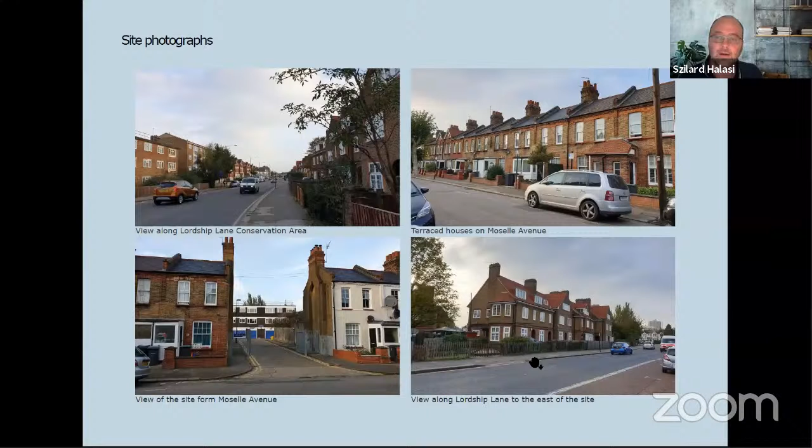So how we started the design, we did a little analysis of the local context and the constraints. Again, just a reminder of the orientation of the site - this is basically south where the sun is. Access to the site currently is through the petrol station and from Lordship Lane. There's no real access to it from the back.

Public transport is relatively close to the site. It's a good location, approximately 9 minutes to the closest tube station, Wood Green underground station, and there are several bus stops in the area too.

The use of the site is commercial at the moment, and you can see on the diagram it's actually a kind of island in the residential sea. So the area is mainly residential with a very small amount of commercial use.

The buildings around the site are 3-story. There are some 4-story buildings along Lordship Lane, and 2.5-story terraced housing on Moselle Avenue.

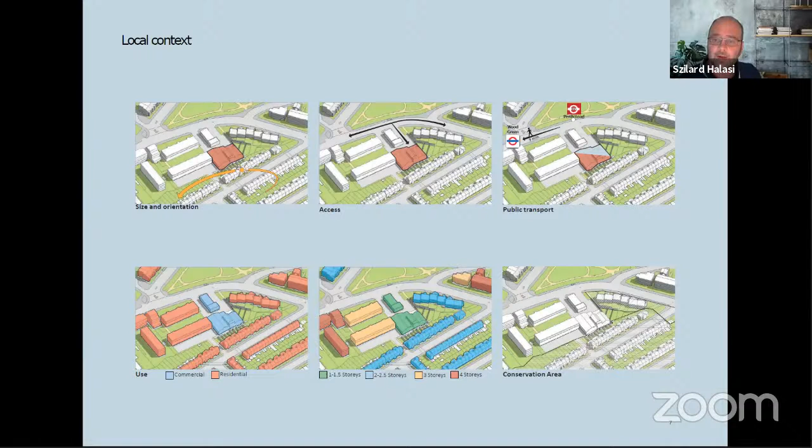The site lies just on the boundary of 2 conservation areas. One of them is the Noel Park Conservation Area to the south, which is quite a large area with 2,000 terraced houses.

Basically we just looked at how this influenced the design. We analyzed the architecture of the existing buildings, especially concentrating on Moselle Avenue because that's where the site is. You can see various features listed here, which include fish scale clay tile, which is quite nice, slate and brown roof tiling, red-brown bricks, terracotta window sills with corbels, string courses. So we analyzed what the architecture of Moselle Avenue is.

The same for the Lordship Lane conservation area, which is along Lordship Lane and consists of 4 or 5 properties grouped together as a larger house. Again, the main materials here are red brown bricks, recently refurbished and replaced roof, and pebble dash render, bay windows. We also looked at how the windows are grouped together, the proportion of the windows, how dominant the chimneys are, and so on.

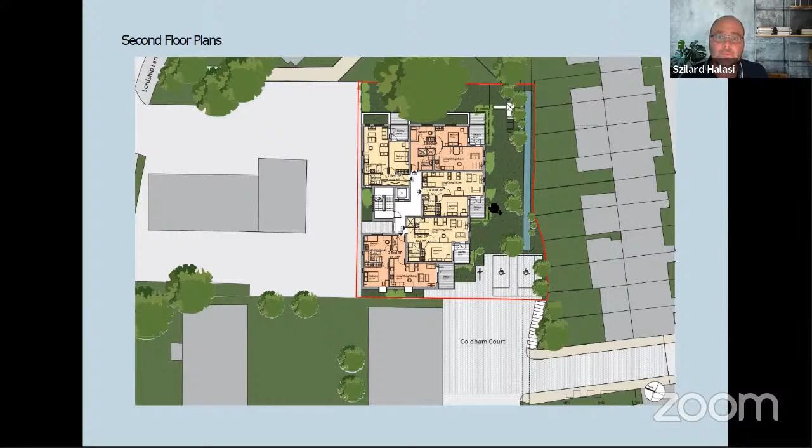Upper level, again, 2-bed units, 1-bed units, dual and triple aspects. So not just having dual aspect to maximize daylight and sunlight, but also to minimize impact on neighboring properties.

The top level, which is the fourth floor, is set back quite well from the edge of the main building. This is because of minimizing impact on neighboring properties, and also people can't really stand by the edge of the roof, so they can't really see down directly to neighboring gardens. We propose a green roof, which is just maintenance access only, to enhance biodiversity in the area.

So how it looks, how it appears. I already mentioned that we basically had a look at and investigated the area. We tried to get ideas from the neighboring conservation area, and referenced back to the architecture of these existing buildings.

You can see on the image, we looked at the proportion of the windows, which are vertical. So we try to create vertical openings on the facade using brick facade, various colored, because you get some nice mix of bricks, not just one single color. Various lintel details and bands are all interpreted into the new proposal.

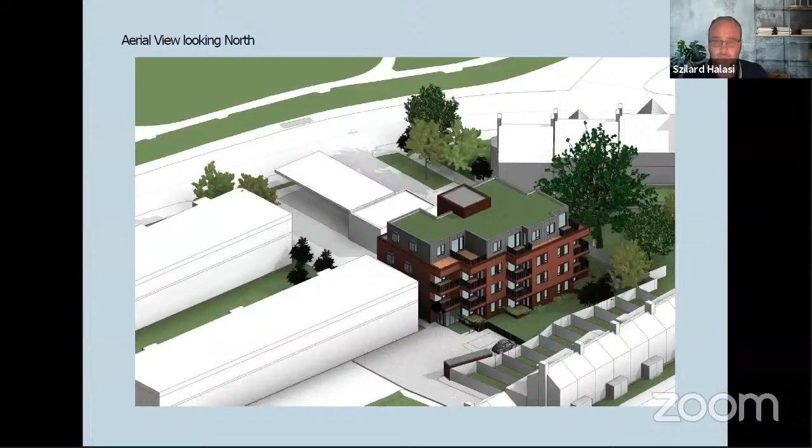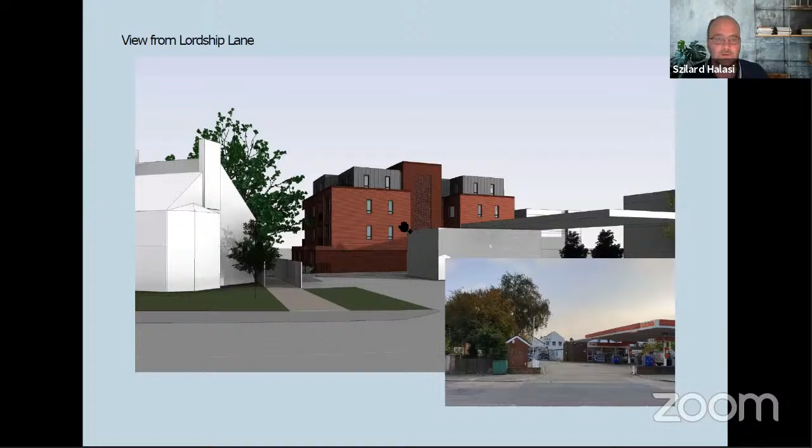A similar view just from Moselle Avenue and Lordship Lane. Again, you can see how it actually sits between the two existing buildings. The tree here you can see is just missed - we didn't show it for clarity, so probably in reality you won't even see this much.

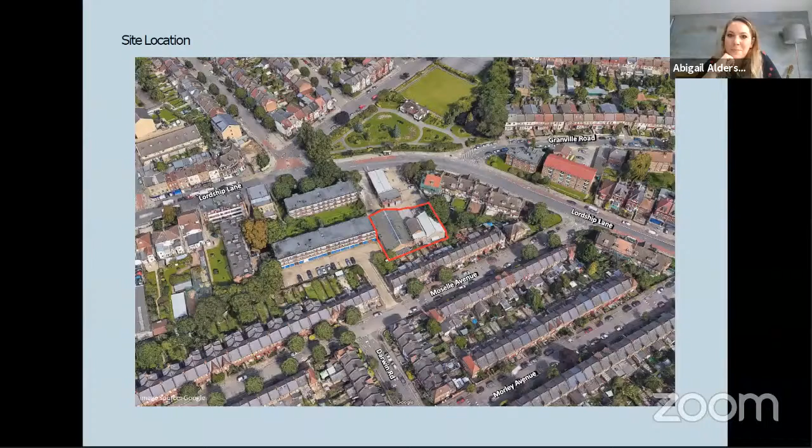Whether or not people decide to do things with it in time isn't covered under this anyway, if that helps. In terms of the question, what is actually going to happen to Arcade Windows?

You mentioned the site itself will be demolished, but will the company be relocated, or is that just unclear? I need to discuss that with the owner, but I imagine they have other premises. I think everyone's downsizing these days anyway.

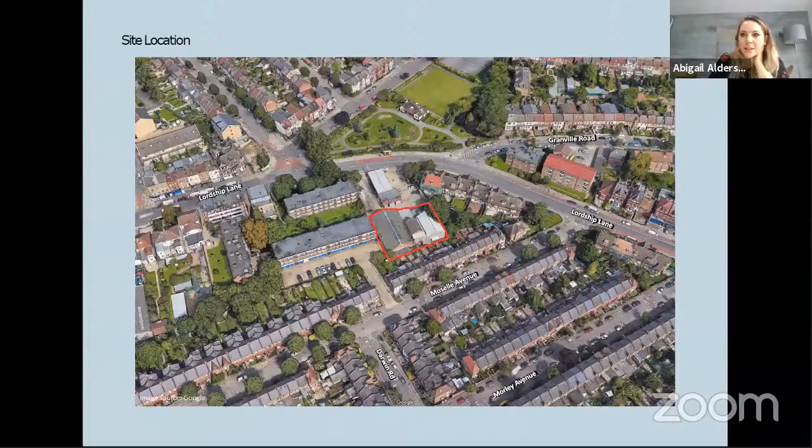So I'll say that has been answered there, it's only about the petrol station. Let's move on to that design question in a moment, but in regards to how tall will the development be.

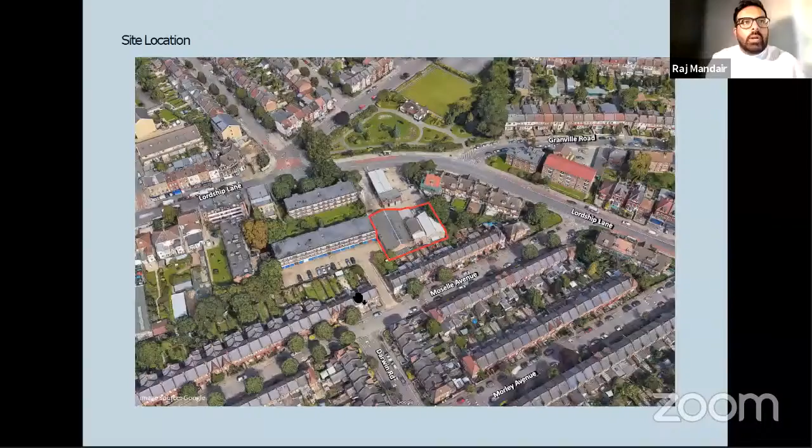Let's go to a slide that shows the development itself. There's an answer right there, it's 4 stories. I'm not sure if your question, I know I'm popping through the screens quickly, but here you are, 4 stories - that's ground, first, second, and third. Some people say ground plus 3, but it is a 4-story building.

I'm not sure if you mean what the actual height is in meters. Szilard, do we have a rough idea of how tall this might be? I know I'm putting you on the spot here. On this image, the floor-to-floor height is usually 3 meters, so the 4 stories altogether will be around 12 meters tall. But as I mentioned, the top floor is set back quite well. The main visible building structure will be 9 meters tall, which is the third story.

You just used that term setback. What do you mean by setback? Setback is basically we've got quite a generous distance - from the edge of, I don't know if you can see my mouse here, from the building line to the top floor wall, the external wall.

Okay, thanks, Szilard. So I'm going to go to another question. Here's a question in regards to why can't you build houses instead of flats? I'm going to give this a go and then I'll give this to Abby shortly.

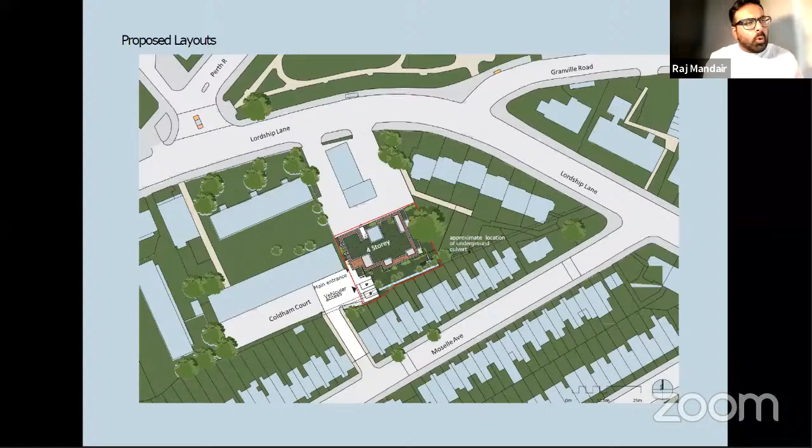So that's one of the key features regarding the conservation area - one of the basically key features in the area, the Noel Park conservation area.

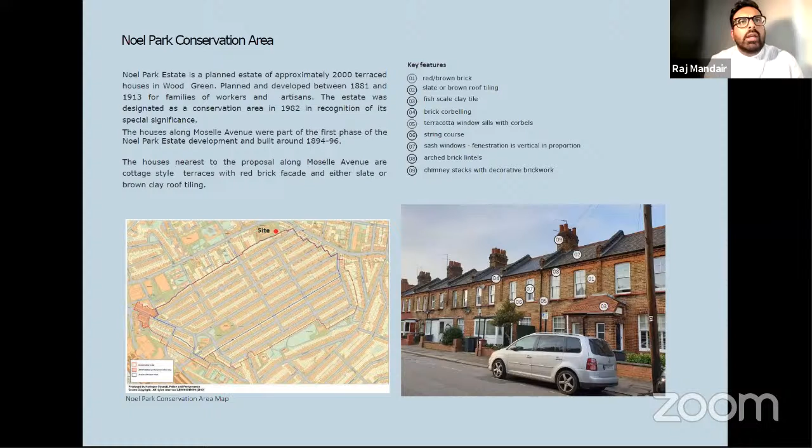Okay, I will move on to - oh, here's a question from earlier. What do you mean by generous? I think the only time I remember hearing 'generous' was probably about the terraces or the private amenity space. So what do you mean by generous here, Szilard?

I meant area-wise and depth-wise as well. The smallest balcony is 6 square meters - actually there's 5.5, 6, 7 square meter balconies. I think that's quite generous nowadays for amenity space, something that exceeds what the policy requirements would be. Minimum requirements are 5 or below 5, so it's bigger than that.

In terms of what's proposed, this image is probably perfect - on the ground floor, the homes above have terraces, and these right here are in the garden. Sorry, on the ground floor, are they kind of private? What would you call them - are these winter gardens, or are they kind of...?

What's the provision on the ground floor? I think the ground floor still has terraces. You don't have winter gardens, still the terraces, but also you have access to a communal garden area. I think that actually adds to the amenity.

Just to add to that, as part of refining the design, we've made sure they've got defensible planting so people don't feel like they're being overlooked from those using the amenity space, and they don't have to put up screens. So we've got L-shaped planting around those, and those are slightly larger. We've got a 3-bed on the ground floor. They do have direct access, but they're also slightly separated from that open amenity space. It's just one of the things we've considered throughout the design process.

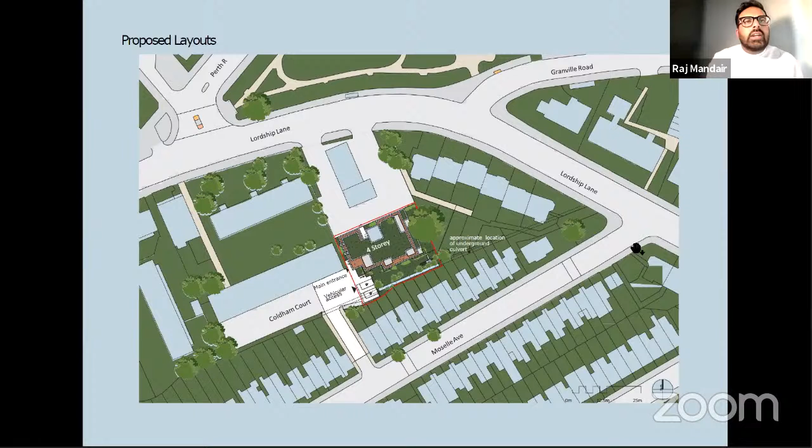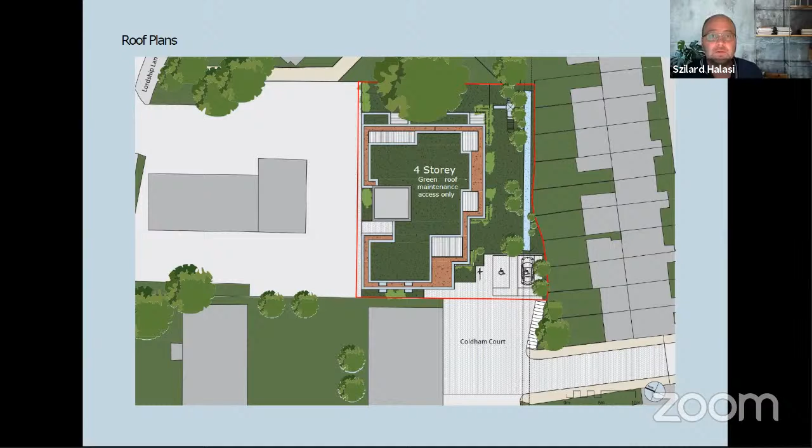Here's another question - so why can't you have a green roof terrace? We have a slide that says it's simply for maintenance access only. Why can't residents enjoy a terrace on top of the building itself? I think it's mainly to give privacy to the neighboring properties. You don't want people up there looking into other people's gardens - these gardens here, and then all the gardens. I'm going to move on a bit as well.

Let's see if there's anything else. So hopefully I answered that earlier. Will the large tree in the garden remain or be chopped down? I think that's the tree Abby was referring to earlier, though that's not within the site ownership of the applicant. Yes, so that is going to stay as well - for the person who asked that question, yes, that tree won't be chopped down.

I know these questions are coming thick and fast. Just a reminder - there's another consultation session taking place on Monday in the same format, and I appreciate that for some this isn't the ideal format. We'll also be visiting you door to door shortly, happy to arrange a phone call or meet you in person, in compliance with Covid regulations, if you'd like a one-to-one conversation in a more interactive manner. Hopefully that addresses how the consultation phase is going to take place. Tonight isn't the last opportunity to ask questions. I do appreciate it's not the ideal setup, but we're making the most of what we're able to do at the moment, and trying to answer your questions as best we can. By all means, if you don't think we've addressed something fully enough, ask, and we're more than happy to discuss afterwards or in a separate forum.

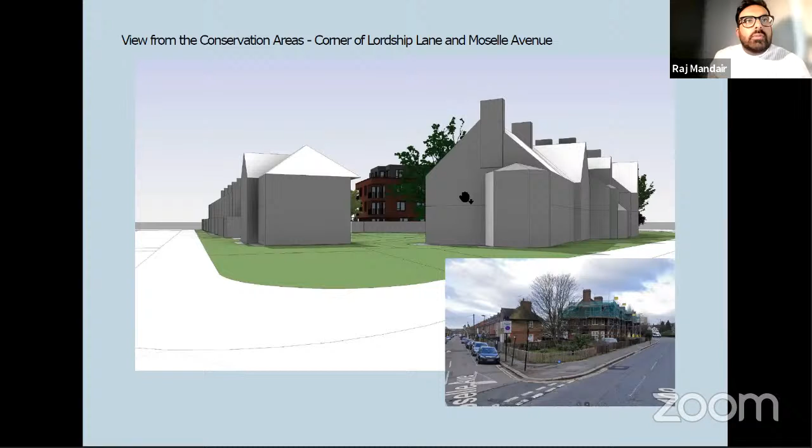Abby, I think you've raised an important point - one question that's come up a few times is the issue of parking. I'm going to group these questions together. One question is there's provision of 2 car parking spaces - where will the other driver tenants park, and whereabouts will they do that? Will there be parking inside the parking at Coldham Court?

And there's a wider question now: how do you stop anyone from doing so? I'm just going to see if there's any other questions. Someone has asked about the issue of the amount of traffic already on the roads, why there can't be basement car parking as part of this development, and why there's no car parking here at all. Harry, would you like to give that a go?

I'm just going to move to the plan - here, I think, is probably a good image. Is that fair enough?

In terms of why no car parking, or why there are 2 blue badge car parking spaces - it's particularly led by the London Borough of Haringey, similar to other local authorities, who have a strong preference for car-free developments, particularly in areas with good public transport links like this site. As part of the development, at least 10% of homes must be accessible, and that's why there's provision of 2 blue badge car parking spaces.

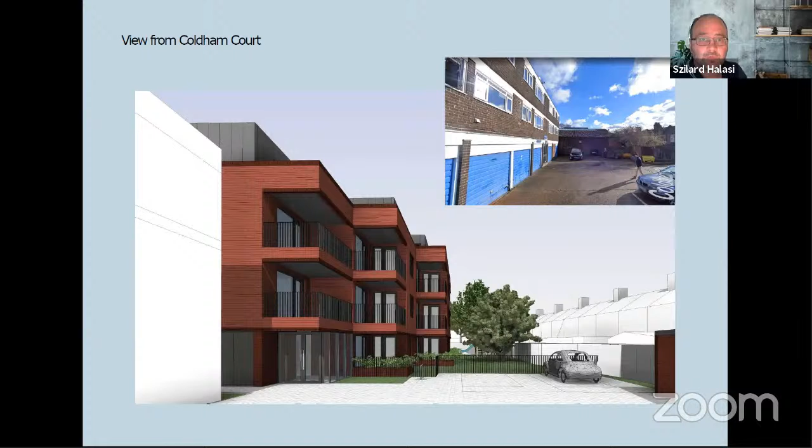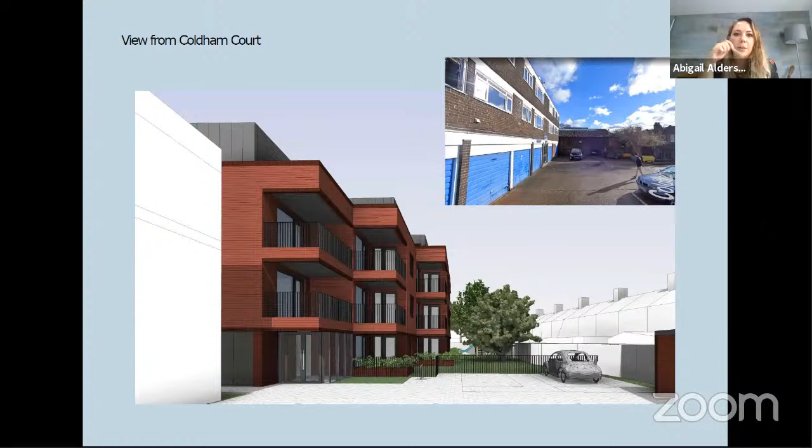Whoever submitted that question - where exactly are they cutting through? Because at the moment there's no access to our site from Coldham Court. But whether it's that you're worried they will do, it'd be good to know. I'm not sure if they can go through here or not. Not at the moment, I don't think. I think there's a fence right the way up.

By all means, do let us know, because that anecdotal information is actually really crucial. I think it's a very good point, knowing how the site operates. At least when we go through the consultation for secured by design, we can think about this - it's not the final design, it's still in progress. So we really welcome these comments, which we can implement and add to the plan.

Raj, did you say there was a previous question about whether or not Coldham Court will be fenced off as well? Did that come up previously? Yes, that's right - whether access, how would you still access Coldham Court? So Coldham Court, that access is something we have a right of access to, but it's not within our ownership.

So we might be able to agree improvements along the highway there, or whether or not it's decided to be secure access. But by all means, that'll have to be done with the council and with Coldham Court. And you mentioned, I think it was Szilard also mentioned, Secured by Design - so who are they?

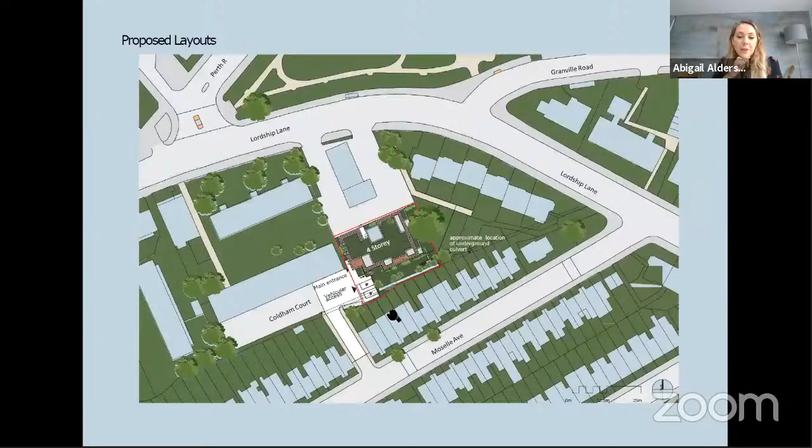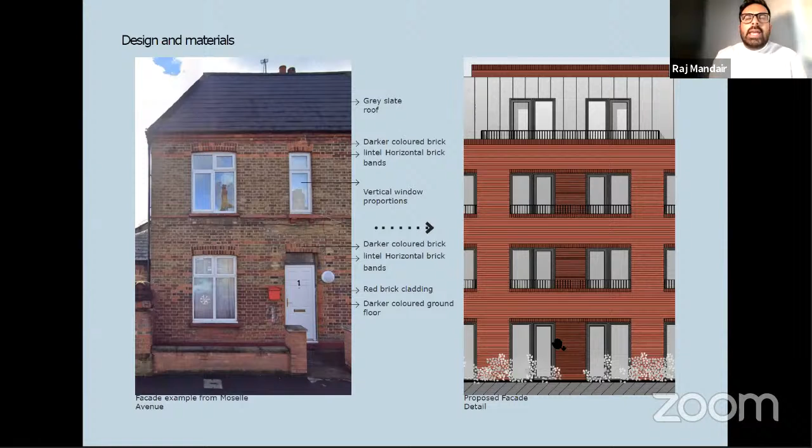In terms of what goes on here, these kind of darker areas, part of the development, and also this part here - what's this material here? Darker material is still brick, just going to be darker brick.

And the staircase, actually, maybe you can see a bit of a translucent stair, so you can see through it. That's a perforated brick, meaning every second brick is going to be left out, so it's basically a hole you can see through. You can have the light coming out as well, so it's going to maybe light a bit the petrol station area, which might be a bit dark. So that's the idea there.

Just to add to that, we've been having discussions with energy consultants, and that really improves the ventilation by having those open brick areas. Also, back to the green roof - it doesn't have to be green, but in terms of energy credentials, it really does add to the scheme and make it sort of carbon neutral, which is what they're aiming to achieve across London.

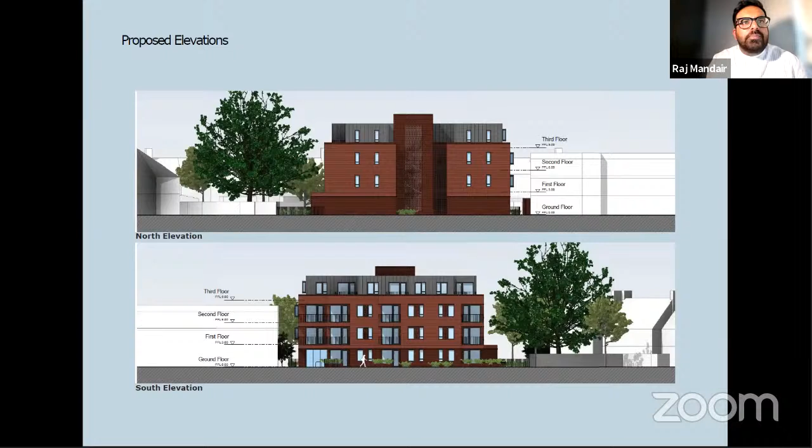So, okay, in terms of - oh no, you mentioned green space. The question here is how much children's play space. I guess we mentioned there will be green space, but let me find it - we mentioned children's play space. I think here in the presentation we've labelled it.

I've actually looked up the policy, and it's only 3 square meters per child required for playground play space. Given that most of the mix is 1s and 2 beds, with 2 three-bedroom apartments proposed, we're providing well above that - I think about 125 square meters, that kind of region, yes, it's quite a big play area. The playground and landscape is still going to be designed by a professional landscape designer, and as Abby said, the area dedicated for the playground is going to probably exceed all requirements set by the council.

So can I ask a quick question about that? Abby, you mentioned - I can't remember how many square meters it was per child - but how is that worked out in terms of the development? So this is 17 homes - how do you work out how many children there are going to be as part of this development? It'll often be based on the unit mix.

So I'm not entirely sure what Haringey's policy is, but a 3-bed might have 1 or 2 children as expected per unit, and a 2-bed might have 1 or half. Obviously in practice you don't have half a child, but it'll be averaged over the unit mix. So there'll be a formula that they would have, and that's how you do the calculation.

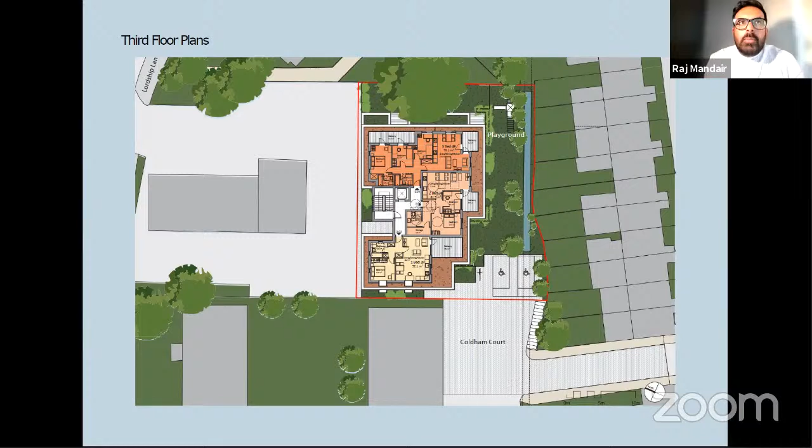Yes, but I think based on the mix, we are still providing well above that. And obviously we still have more discussions with the council on affordable housing. I believe the council also own Coldham Court, so whether or not it's available to residents of that we will need to iron out in due course. At the moment the plans show a green space, and I'm not sure what the marking here is on the floor plans, but we've labelled it as playground.

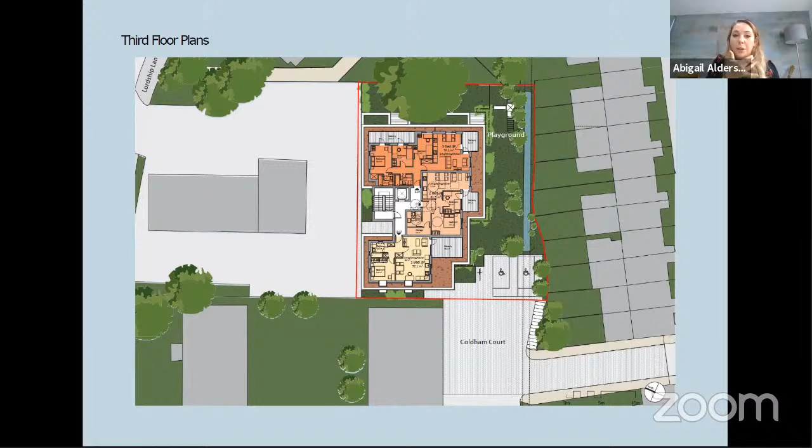Will there be further information in terms of what it will look like, and it won't just be green space? Yeah, I'm sure with the planning application we will submit a landscaping strategy showing visuals, all mapped out, and that can be conditioned as well so it has to be delivered in line with that.

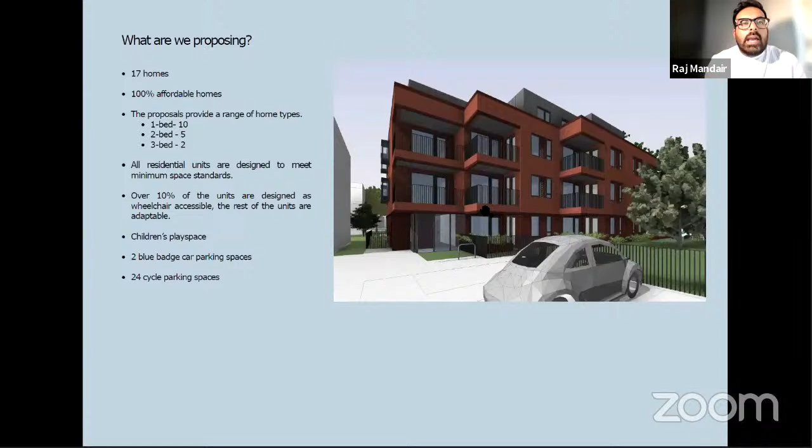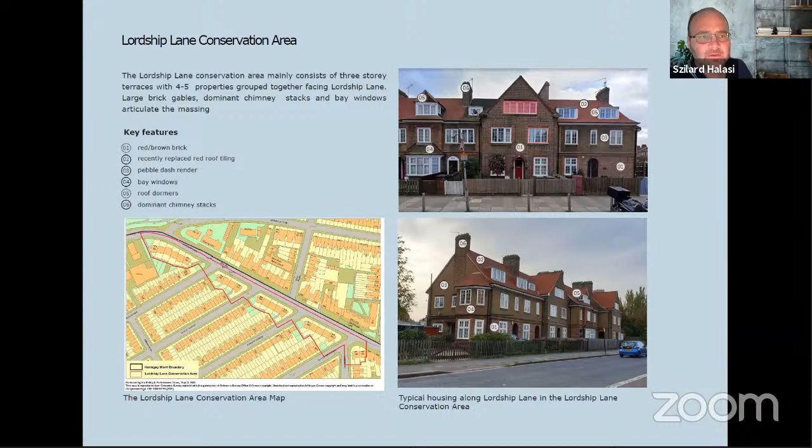So we haven't mentioned this previously - I think we are coming up to something like separation distances. So I imagine, what is the distance between the building itself and its neighbouring buildings? I'm not sure what the best slide there is, Szilard. I imagine another kind of follow-up question - the site plan would be the best to show. Okay, I'll let you get back to that, and I guess another follow-up question.

So one is the distance from neighbouring buildings, and is it going to impact overlooking, daylight and sunlight of neighbouring properties? The separation distance is 18 meters from the back facade of the building at Moselle Avenue and between our building.

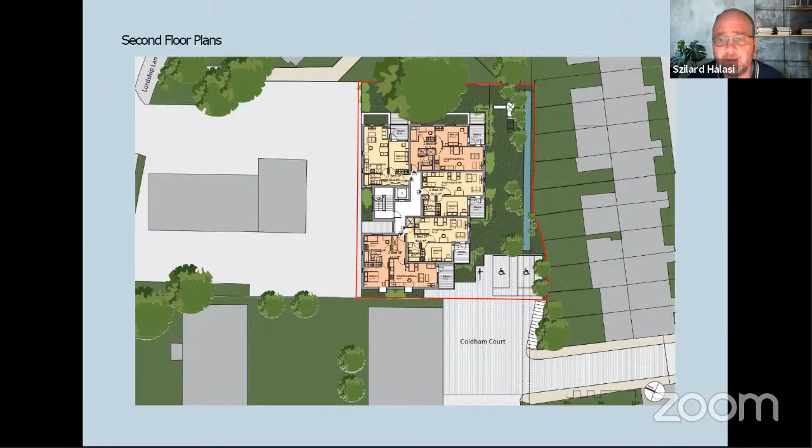And when you say our building, do you mean from the terrace, or do you mean? Actually on all of the plans there's a dotted line here which shows the 18 meter. So you can see the 18 meter actually is more in certain places than 18 meter. This is in accordance with the local requirements by authorities, and also this 18 meter is considered a good distance to avoid any disruption for overlooking, daylight and sunlight.

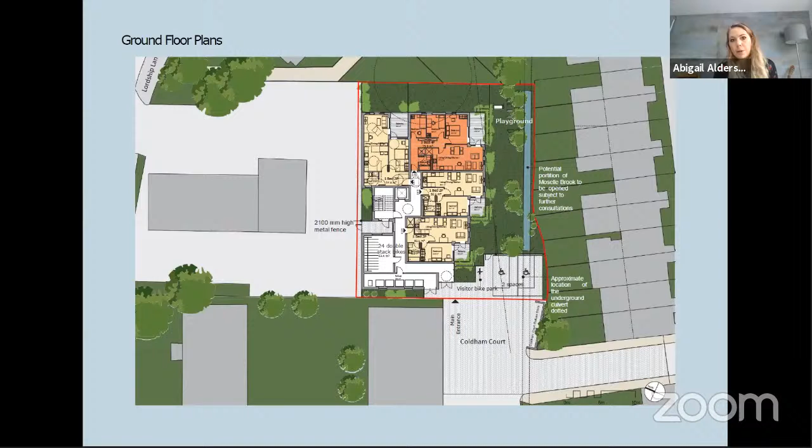Yeah, basically I would say that. And am I correct in saying that the existing footprint of the building extends further than that at the moment? I know it's got first floor windows that look out as well. The existing building occupies the whole site, so it's actually going up to the boundary of the ownership. So we are actually setting back and improving the separation distances.

Okay, thank you. Thanks both. We haven't got any other kind of questions that have come up.